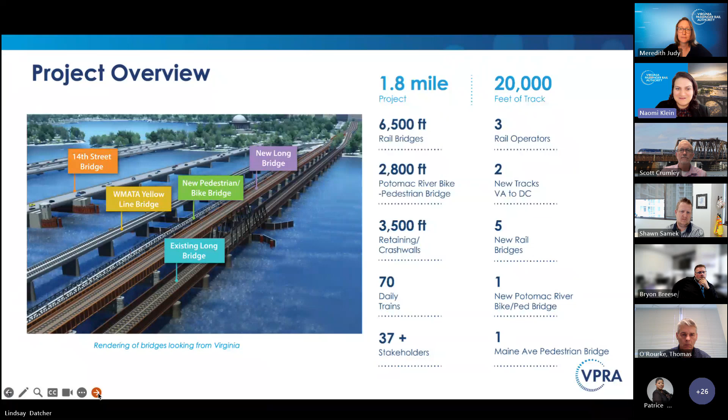So this project is so large that it's actually broken into two packages for the purposes of construction, what we call a north package and a south package. So the north package is everything in the district. It starts in East Potomac Park on the other side of the Potomac River, goes across I-395, goes across the Washington Channel over Maine Avenue, through the Maryland Avenue overbuild, and then ends just south at L'Enfant Station. And then the south package is everything over the Potomac River and into Arlington, Virginia. So that 2-track rail bridge across the Potomac River and the bicycle pedestrian bridge.

This project is fully funded, both packages. For the north package, we're doing what's called a progressive design build method. For the south package, it's a design build method. But I think the most important part is that we've got our design build teams on board for both of those packages and are advancing towards final design and construction.

We're here today really to talk about the north package, but we'll also be talking about impacts to people who use the Potomac River for boating and other recreational activities. For the north package, we are already beginning what are called early works, which are basically smaller construction packages that allow us to get ready for that larger bridge construction. So things like utility relocation and changes to traffic patterns to set up our staging and access areas.

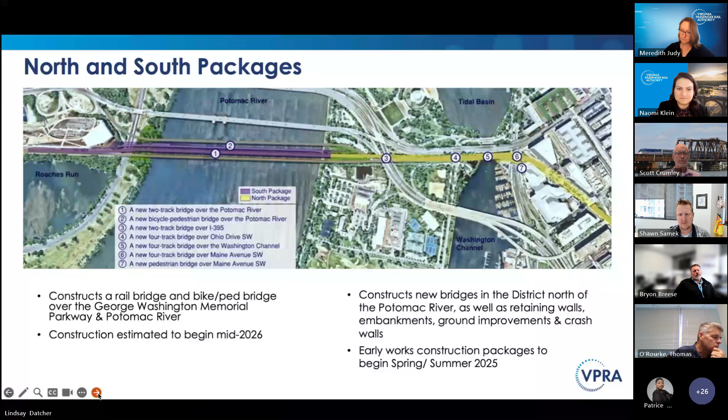For the south package, we are moving into final design, and we believe that construction will be starting mid next year. Go to the next slide, please. And this is the area, so again, we're here today to talk about the portion of the project in DC and some of the changes to traffic, specifically around the Maine Avenue area.

So the rail bridge over Maine Avenue is really the critical path for this project. The reason being is that over Maine Avenue, the space that we have to work in becomes so constrained that we cannot build a separate structure. There is a 2-track rail bridge over Maine Avenue. We will have to take down that 2-track rail bridge and build a new 4-track rail bridge, all while still maintaining rail traffic. So that's a very complicated process, which I'm sure we can get into detail if people have questions at the end of the meeting.

And then in addition to constructing that 4-track rail bridge, there is a current pedestrian bridge that crosses Maine Avenue. It is privately owned by the owners on the Maryland Avenue overbuild at the Salamander Hotel and the Portals development. And that bridge will have to be taken down in order to make room for the 4-track rail bridge. And we will be reconstructing that bridge and also adding some ADA improvements. That bridge is currently only accessible by staircases. It's not ADA accessible. So we'll be adding a ramp.

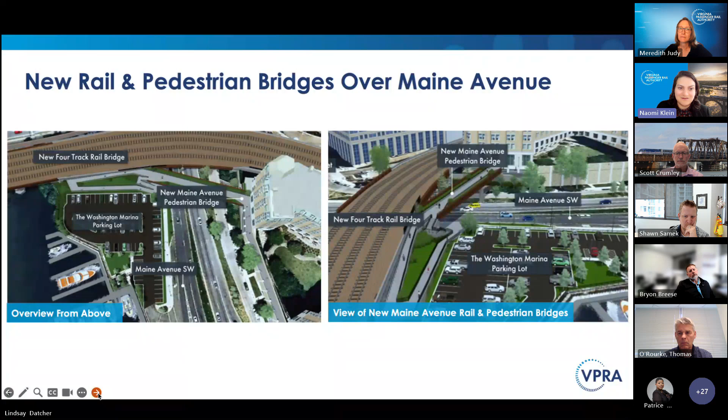So you can see some renderings of that from an aerial version. And these designs have already been reviewed by the National Capital Planning Commission and the Commission of Fine Arts. So you can go to the next slide. This is our timeline of where we have been and where we are going. So preliminary engineering began in 2022. Prior to that, DDOT, the district, was actually the lead on the project. They did the environmental assessment and then handed the project off to Virginia, to VPRA, to complete design and construct.

So we completed preliminary engineering at the end of 2023, and we began final design when we brought on the Progressive Design Builder, Skanska Flatiron Joint Ventures, and we're nearing the end of final design now. We're starting our early works construction packages. And then we anticipate construction for the next 5 years. Like I said, we're doing the early works packages now through the beginning of next year. And then we anticipate starting full construction mid-2026 and completing construction in 2030. You can go to the next slide, please.

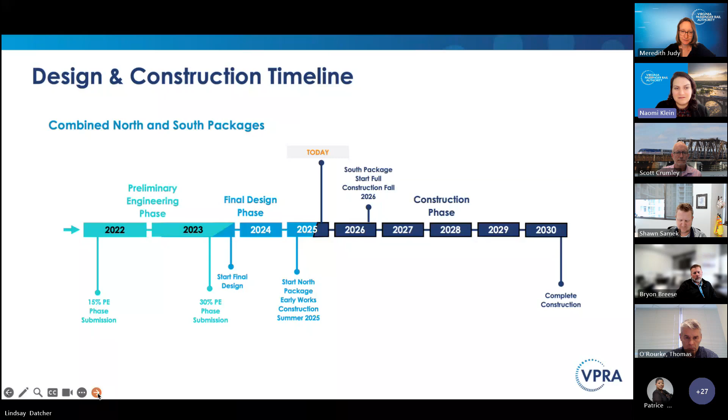Okay, and I believe now I'm handing it off to Brian. Good afternoon again. My name is Bryon Breese. I'm the project manager here for Longbridge Rail Partners on the South Project. So we have a short animation here that we want to show that'll kind of give you an idea of our overall construction approach to build both the rail bridge and the pedestrian bridge, just to give everybody an idea of how we intend to build this project.

So I apologize, but there is no audio. So Meredith, Lindsay, are you able to back up? I think there's a button to click to make the audio come on. Yes. Sorry, we tested it. Give me 1 second. Which button were you referring to? Because I don't know it as well as your team. Sorry, I thought there was a button. Unshare it, and when you hit share again, in the upper right corner, it should say include audio. Okay, I did that. Give me 1 second. Let me try it again. Sorry. Okay, thank you.

We'll give it one more shot here. If I have to, I can certainly narrate it. Right. Yes, you do know it well enough, I would say. Share audio. Entire screen window. We're gonna try it again. Give me 1 second. Okay. The construction. Could you hear it that time, Meredith? We heard it for a second there. Okay, great. Okay, I'm gonna start it back over. Okay.

I think we lost audio. We're back to not hearing it. Yeah. Let me see. Okay, well, we can have Brian. That's really odd, I'm sorry. I'm not sure why it's not continuing. It's okay, I know you tested it. These things happen. We'll let Brian talk through the video. All right, I'll do my best. Go ahead, Lindsay. Okay, sure. Yep.

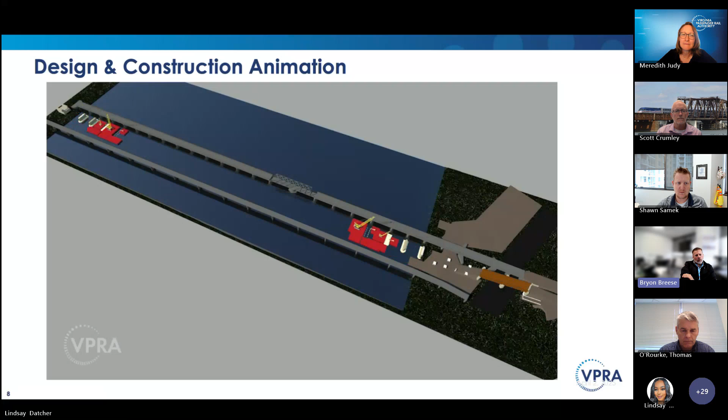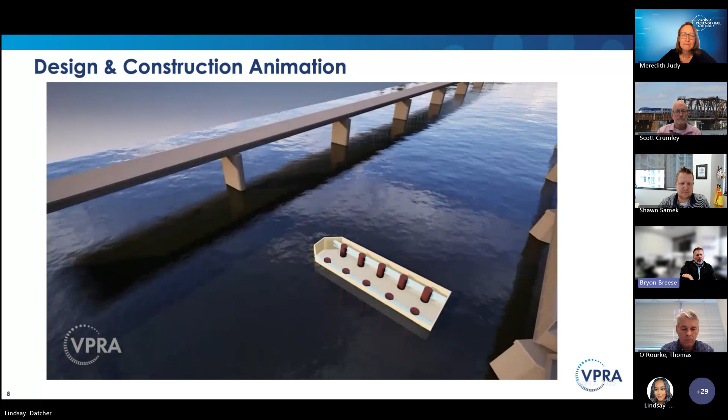So just to give everybody some orientation, Virginia is down on the lower right-hand corner and DC is on the upper left. When we start construction, we're taking a floating approach. We will be attacking the job from both shorelines, working our way towards the middle. So we'll have some pile driving cranes out there, followed by some substructure cranes. What you're looking at is a unique way of erecting the tubs here to keep additional crane booms out of the air, considering FAA traffic and railroad traffic. Again, we're working our way to the middle so we can vacate the main channel.

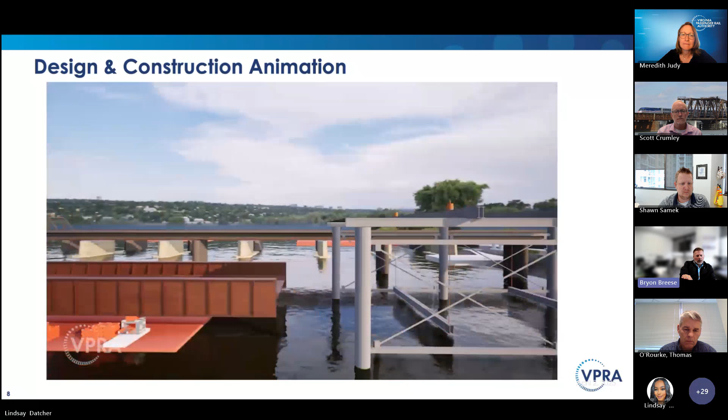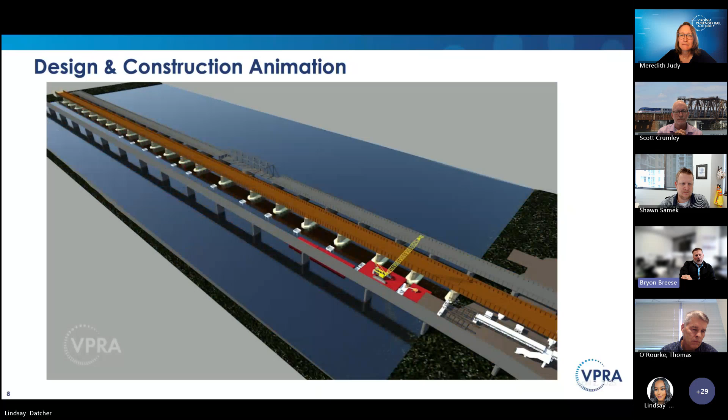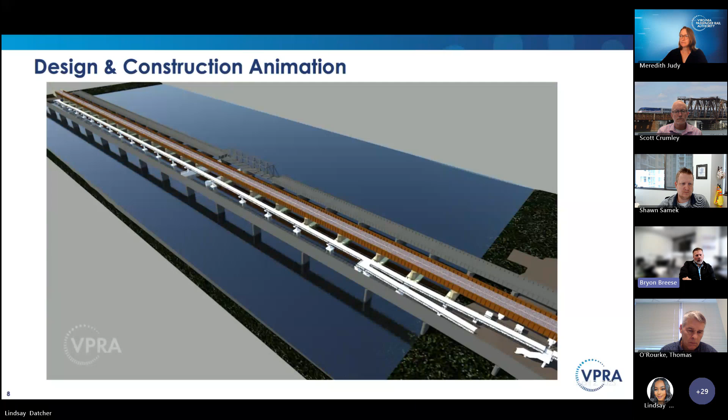The superstructure will be erected through a unique jacking system from barges, keeping crane booms out of the air. We're very limited on space, so we'll bring the units in completely assembled, put them on barges, and jack them up into place. The PED bridge, after the rail bridge is constructed, will be constructed in a similar manner, working from the Virginia shoreline through to DC. Similarly, we'll drive pile, followed by substructure erection, and the superstructure erection will actually be performed from the new rail bridge.

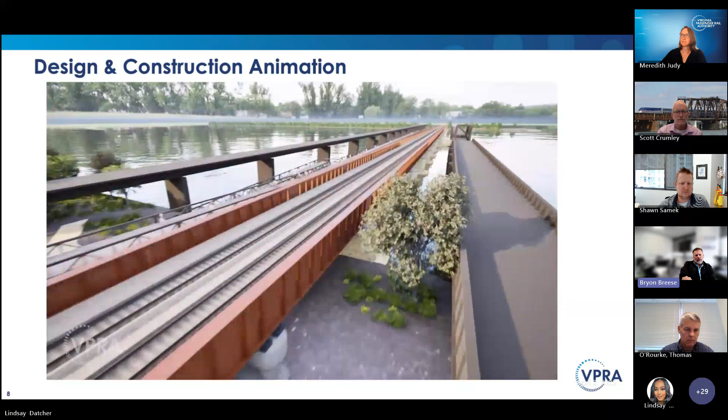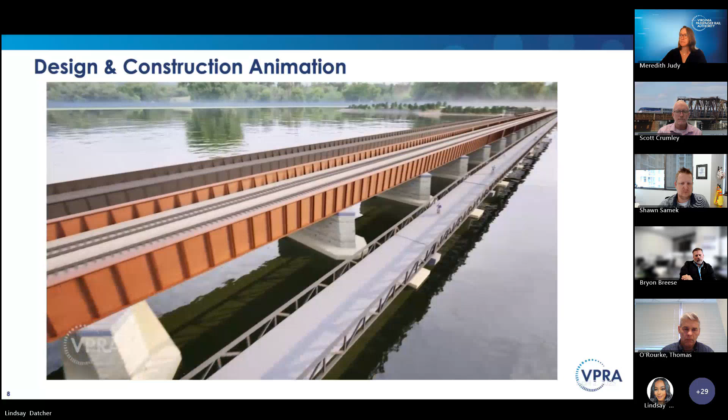Again, space is very limited out there, so once we have the new piers for the PED bridge in, we have very limited opportunity to fit additional barges in there. This is a view looking back towards Virginia. You can see the new Long Bridge on the left with the PED Bridge on the right, tucked in between the WMATA Yellow Line and the existing Long Bridge.

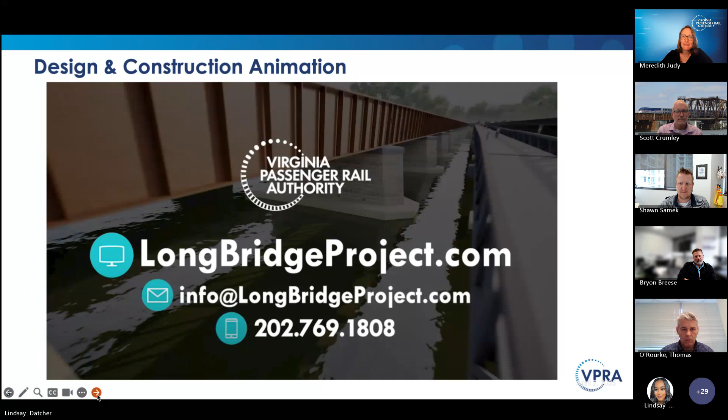So I don't think I did quite as good a job as the narration, but we'll figure out why it didn't play for next time. Yeah, you did great. And I'll put the video link in the chat if anyone wants to watch later. Thanks, Bryon. You're welcome. All right, next slide, please. Okay, so we can start

with an explanation here of completed activities and ongoing and future activities for the South Project. For the last few months, we've been working through what is called our scope validation phase, a period where we're allowed to go out there and validate some of our design assumptions. So we've been out on the water taking geotechnical borings to validate our geological assumptions, doing some non-destructive survey of existing structures, things along those lines.

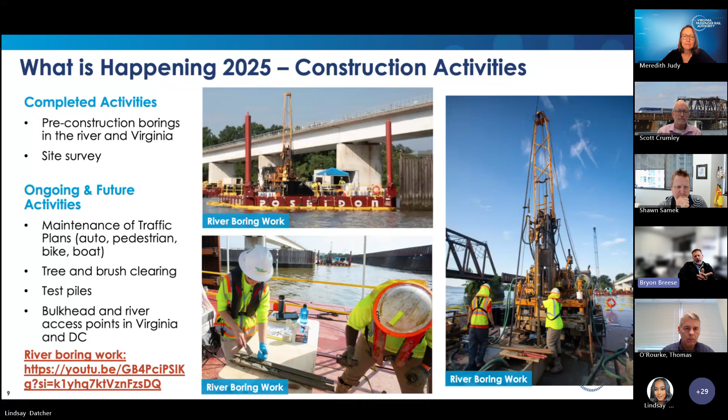The boring operation completed last month, and we've since demobilized the drills and a majority of the barges from the river. Looking forward, we're going to have some tree and brush clearing on both sides of the river, both DC and Virginia. And then we're going to get into our test pile operations. So we have 4 test piles. Actually, I think that's on the next slide, so I apologize. Next slide, please.

And again, the purpose of the test pile operation is to verify the engineering assumptions that we made as part of our design, so we can fine tune and optimize our final design. You're going to hear repeated blows of the impact hammer hitting the pile over a period of time. After we drive the test pile, we have to load test it to make sure it has achieved its assumed capacity. What we're proposing is a dynamic load test, which is a controlled explosive that basically imparts the future load into the pile.

So what you're going to hear is an explosion, but it is controlled. If you're not looking for it, you probably won't hear it from too far away. Obviously, the area around the test pile operation will be controlled from a public perspective.

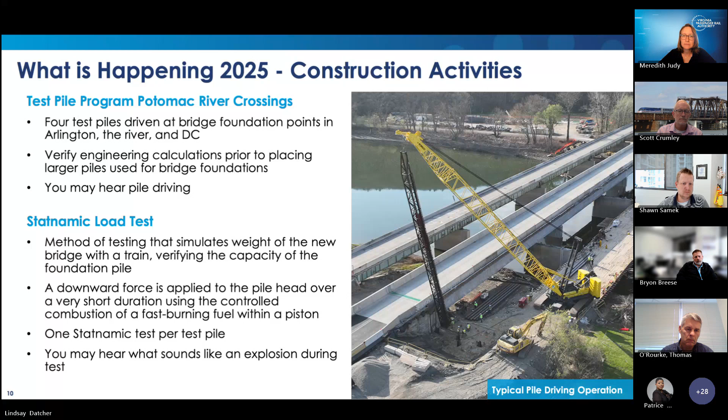Boating community. So when we get out there at various phases of our work, very similar to what you would have out on a roadway where you have maintenance of traffic and you're working in a lane closure, we need to control the boating public as they're working through our work zone. So over the course of this past summer, we were generally out there working amongst the boating public without incident.

Moving forward, as we mobilize those barges, those cranes out onto the water, and we're working our way from the shorelines out to the navigational channel, we'll be setting up a controlled exclusion zone, keeping the boating public out of our work areas from a safety perspective. You'll see a series of signage and buoys that guide the boats through the work zone so they can go up and downstream safely. That zone is going to shift as our work area shifts, but that's what you can be looking for. And of course, those navigational alerts will be posted for public consumption.

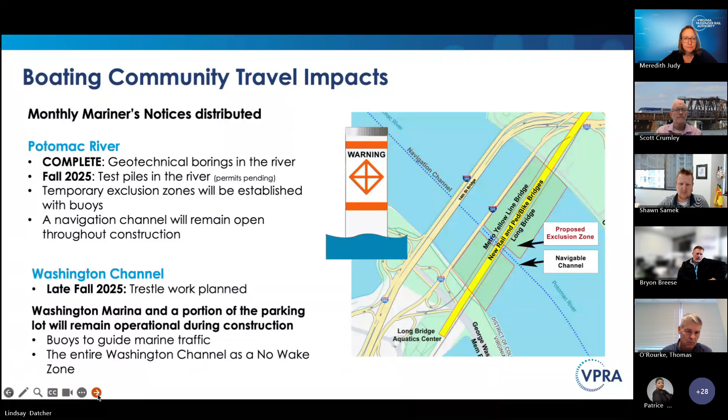And I think I'll jump in here, Bryon. Yeah. On the north package, there has been quite a bit of construction going on, not the least of which is a traffic switch along the 14th Street access road and along westbound Maine Avenue. If y'all travel that area, I'm sure you've seen the maintenance of traffic devices and so forth. Westbound Maine Avenue has been reduced to 2 lanes. But there is a good bit of ongoing work that will continue.

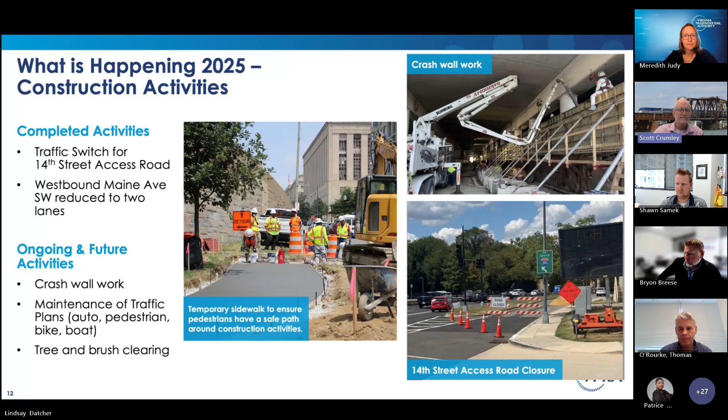Crash wall work has been ongoing for some time. It will continue to occur underneath the Maryland overbuild. And like I mentioned, there's a lot of maintenance of traffic activities going on in the field, as well as future plans for future maintenance of traffic phases. Some of the tree and brush clearing has occurred, but there will be quite a bit more as we get into the winter months here. Next slide.

Just to expand on the 14th Street access road closure operation here, this graphic signifies the current state of conditions along westbound Maine Avenue there. You see in orange that access road from westbound Maine Avenue to northbound 14th Street has been closed, along with the right lane along westbound Maine Avenue. And so what that necessitated is a change in operation along the access road in order to maintain access to the 1331 parking entrance and the loading dock.

Access to both of those areas will be maintained uninterrupted, but it did change the operation of the access road from a one-way operation to a two-way operation. So motorists bound for those accesses need to come in from D Street. And this setup has been in place over a month now. So I think folks are getting used to this operation. We've heard that operations through the area are actually operating fairly well. So that's good to hear, but we'll continue to monitor moving forward. Next slide.

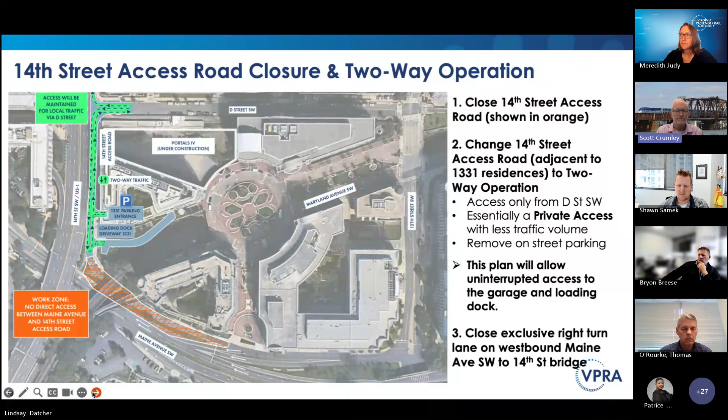We do have a traffic alert video that was issued several weeks ago to explain that access road closure and the maintenance of traffic changes. It's about 2 to 3 minutes long, and I don't know if we want to show it because if the sound is not working, maybe we'll provide the link, Meredith. Would that make sense? Yeah, Lindsay, do you think that issue might be solved, or do we want to just skip this? I mean, Scott has explained it.

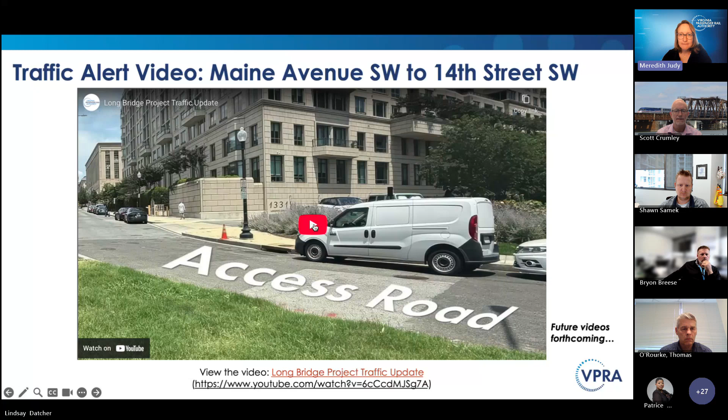Okay. All right. That's all right. Yeah. We can skip. It's worth a try one more time. That's right. I think Bryon did a better job narrating on his video. I don't want to chance it on this one. No, I think you've explained it. Come on, go for it, Scott.

But I'll just let the group know that there are future videos forthcoming like this one. Yes. So stay tuned for those. Yeah, there's a really nice one coming out in the next week or two that will explain all of the traffic changes upcoming on Maine Avenue between now and 2030. What we're anticipating. But of course, you'll want to stay tuned in over time. Right. All right, next slide.

Just to highlight kind of big picture here, there's really two phases of construction that I wanted to tease out here along Maine Avenue. There's a westbound construction phase and an eastbound construction phase depicted by the two graphics here. The westbound's in the dark green, which is mainly working up near the Salamander Hotel and the Portals development. The eastbound construction will be when work is occurring over within the Washington Marina.

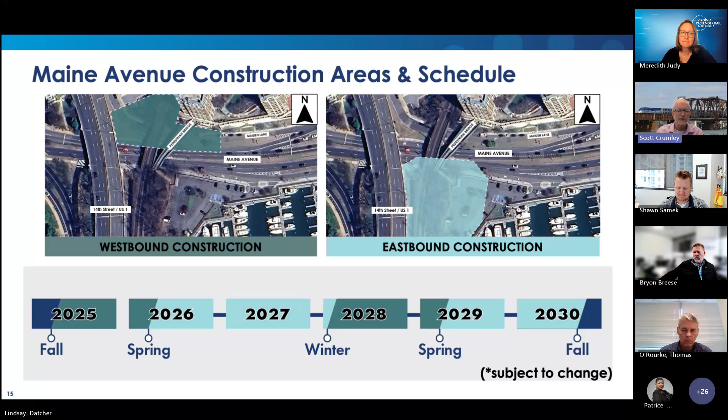The schedule below kind of corresponds with the colors. So the westbound construction phase that we're currently in will be in place until approximately spring of '26, where then traffic will be toggled to the eastbound construction phase. And so the travel lanes along Maine Avenue will be changed, kind of toggled back and forth, basically between now and 2030. So a lot more details to share, but big picture, we thought that would be helpful to show these graphics here. Next slide.

Throughout all this work along 14th Street Access Road and Maine Avenue, our goal is safe access for all road users. There are a lot of road users and constraints and demands in this corridor, not the least of which are tens of thousands of motorists along Maine Avenue, hundreds and thousands of pedestrians through different periods. Of course, the Salamander Hotel, the Portals development has multiple construction projects going on in the vicinity. The Washington Marina is operating its ports and so forth, as well as the train operations of CSX, VRE, and Amtrak.

So our goal is safety throughout construction, and we're trying to streamline that construction as much as possible and minimize impacts. There will be the need for occasional nighttime lane closures along Maine Avenue and potentially some weekend detours. Of course, there will be plenty of advance notice prior to those occurring.

Like we talked about, the 14th Street Access Road has been closed to improve safety. You may already see some utility work going on out there. The Skanska Flatiron team are moving quickly to get that work done. There will be periods where the 14th Street ramp to Maine Avenue will be closed for some extended periods. I'll talk a little bit more about that in a little bit. But along Maine Avenue, we'll always be maintaining 2 lanes in the westbound direction during construction.

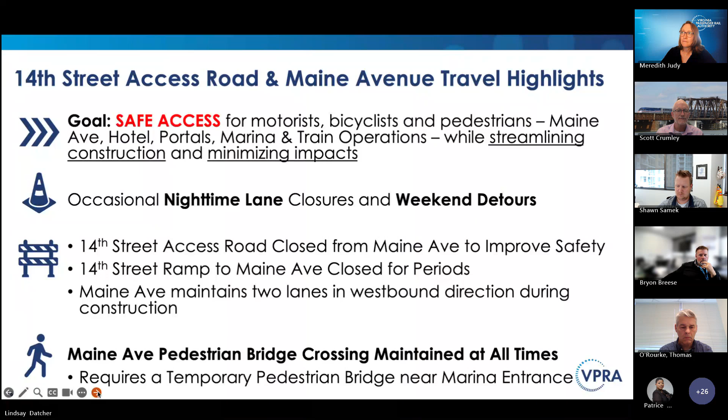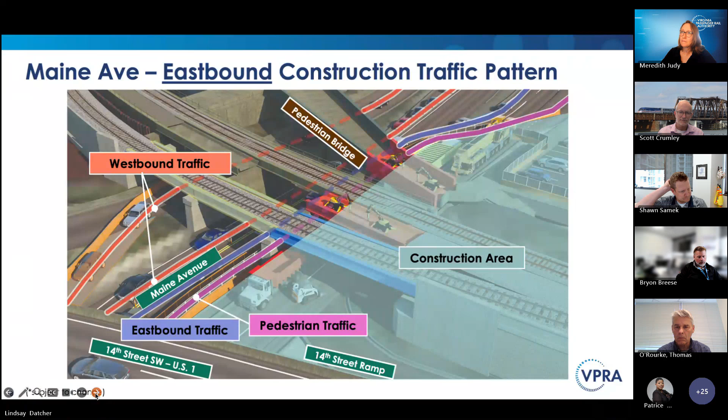So I wanted to tease out and highlight one ramp closure. This is the northbound 14th Street ramp closure to eastbound Maine Avenue. It's kind of tucked in there between 14th Street and the rail corridor, where motorists are able to come up to a traffic signal and make a right turn onto eastbound Maine Avenue. This ramp will likely be closed throughout most of construction.

Because right along that ramp and approaching Maine Avenue is a new retaining wall that needs to be constructed and the new rail bridge over Maine Avenue. And the constraints of the construction in there and the room that's required to construct the bridge and that retaining wall necessitate it to be closed.

So the traffic signal will be removed when that ramp is closed, and we're currently collaborating with DDOT on several detour alternatives, again, to minimize impacts as much as possible. And of course, well before the ramp is closed, advance notice will be provided to motorists, pedestrians, and bicyclists through the area. Next slide.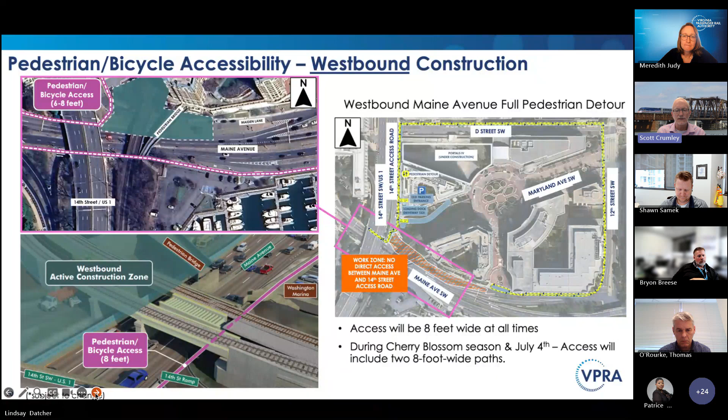The access along the eastbound lanes of Maine Avenue will be 8 feet wide at all times. And actually during cherry blossom season and the 4th of July, that access will be widened to include two 8-foot wide paths to accommodate the pedestrian demands. Next slide.

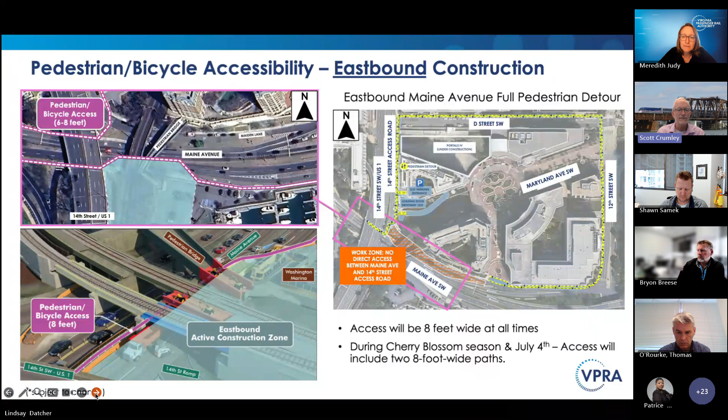Similarly, in the eastbound construction phase, pedestrians will be maintained along the eastbound lanes of Maine Avenue. They'll be rerouted a little bit, but they'll always be maintained there. The path will be 8 feet wide, and during those peak seasons, it will be widened to two 8-foot wide paths. But on the westbound side, pedestrians will continue to be detoured to 12th Street and D Street to keep them completely away from the work zone for safety reasons. Next slide.

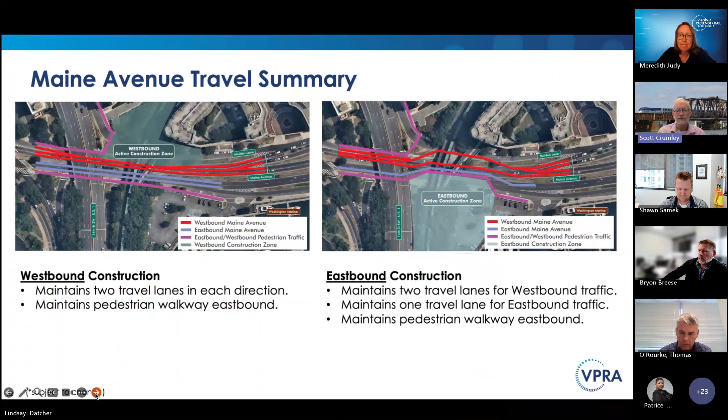So in summary, this line diagram indicates the number of travel lanes and the pedestrian paths for the westbound construction traffic pattern and the eastbound construction traffic pattern. Just to highlight, 2 lanes along westbound Maine Avenue will always be maintained, and along eastbound Maine Avenue, 1 travel lane will be available in the eastbound phase, but 2 lanes will be maintained during the westbound construction phase. Next slide.

We are, like I mentioned, working to minimize and mitigate the construction disturbances as much as possible. Here's a sample list of how we're going about doing that. Complying with the district's noise ordinance. We're regularly monitoring noise levels to ensure that we stay within the established limit. Using backup alarms that regulate the volume based on ambient conditions.

We're also monitoring vibration to ensure the structural integrity of adjacent buildings, and the design as well as the construction equipment. We're really trying to utilize drilling equipment as much as possible as opposed to pile driving to minimize the vibrations throughout the area. So again, this is just a sampling of the mitigation measures we're taking, but we thought this would be helpful. And I think that's it. Meredith, I think you're taking over the next slide.

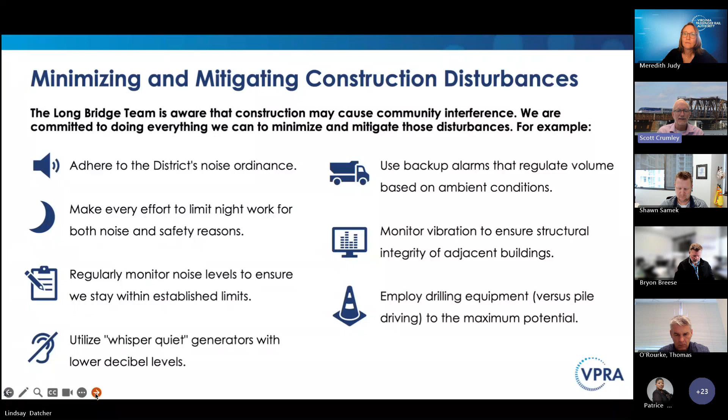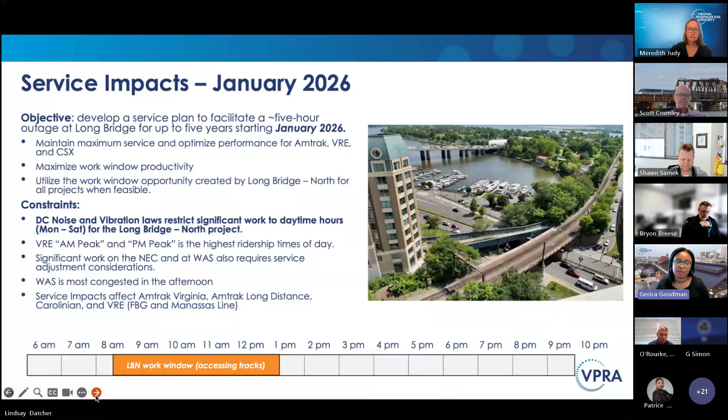There is also work on the Northeast Corridor with Amtrak and at Union Station that requires some adjustment. And Washington Union Station is significantly congested in the afternoon. So there will be service impacts that affect Amtrak Virginia, which is our state supported service, Amtrak Long Distance, the Carolinian, which is North Carolina state supported service, and the VRE lines, both the Fredericksburg and Manassas line. Get the next slide.

So while schedules aren't finalized, as it currently stands, for the temporary service adjustment VRE trains will all be in service. However, some trains will start and stop at Alexandria instead of Union Station. VRE is also bringing back the Amtrak Step Up program. So if you are a VRE multi-ride ticket holder, you'll have more options. You can use any of our Amtrak Virginia state supported trains if you have a multi-ride ticket for VRE. And there may be some schedule refinements throughout the process, or while we're reevaluating, some schedules may be tweaked a little bit.

For Amtrak Virginia, we will be having 4 daily round trips as opposed to 5 in the Hampton Roads area, so 2 to Norfolk and 2 to Newport News. We're implementing daily express bus service to and from Hampton Roads. So there will be a bus to and from Norfolk and a bus to and from Newport News. So an additional opportunity from Newport News. Those buses will also stop at Virginia Beach. So there'll be 6 combined rail and bus round trips.

And some of the departure and arrival times for all our trains will shift slightly too, but all of the connectivity will remain. We have created a page on our website on our Plan My Trip service. There's a service guide, and VRE is also creating a page for the service changes, and will also help you use your transit benefits, because you may have to do a 2-seat ride to get into DC utilizing WMATA. We have more information to come, but we just wanted to preview this as we have this meeting scheduled. So please stay tuned. There will be more information once those schedules are finalized. Thank you.

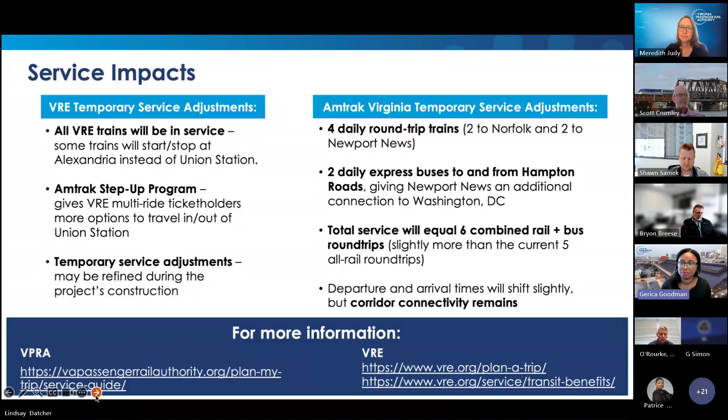Thank you, Gerica. Next slide. Okay, we'll shift into our open discussion. Patrice Brooks with Tina Boyd and Associates is going to facilitate our question and answer. Looks like we already have some questions coming in. That's great. We want to make sure that we hear from you. Patrice. All right, thank you, Meredith. Thank you, team, for the presentation. As Meredith said, we do want to get started and open the call for discussions. I see that we do have a hand raised. I'm going to go ahead and allow you to unmute yourself and ask your question. If you don't mind just stating your name before you ask your question.

All right, thank you so much, Shawn. Do we have any other questions from the community advisory group on the project, or are there any events that you think that we should attend or participate in, or any avenues where we can share project information such as the newsletter or listserv?